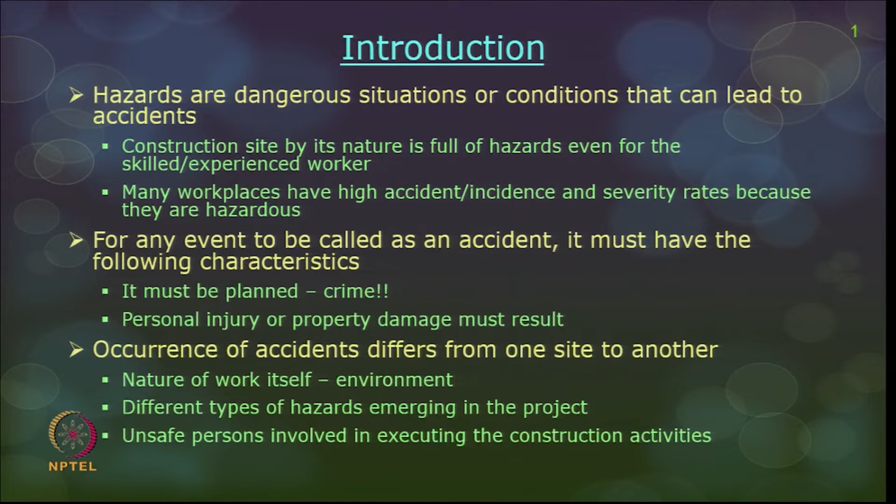Different types of hazards emerge in a project because projects are generally unique and challenging, and unsafe people involved in executing construction activities is also a common factor, as we saw in last week's class. So most accidents are actually linked with unsafe activities of workers available at the site.

Let's get an idea of the causes of accidents and their effects. Causes start from carelessness of the work nature - even though you know you have to take all precautions and how to execute the work, sometimes it goes off your mind and you are careless, along with negligence to follow safety rules and procedures. This is primarily one reason, and it ranks number one in many construction sites.

Unsafe working conditions, for example, dropping or throwing materials from high rise structures just because you do not want to come down or pass the material through proper ways like a chute. This dropping is primarily an unsafe working condition or practice.

Failure to follow safety rules includes an improper way of operating equipment or executing construction work, or operating a defective tool or machine - these are all failures to follow safety rules. Even failure to wear PPE is also one of the violations of safety rules. Improper use of safety items, like faulty scaffolds or ladders, the way scaffolds are used in construction sites - all these can be examples.

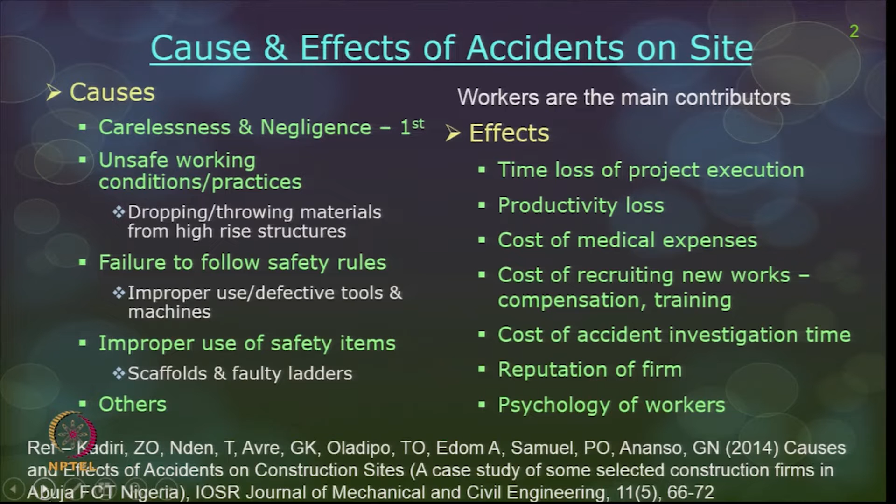So accidents have to be controlled. There's also the reputation of the firm, and the psychology of workers - when they start feeling they are always unsafe in the workplace, that psychology can demotivate them and reduce productivity.

Now, what do you mean by accident investigation and why should you do it? So now we are into the topic. It is important to investigate all accidents regardless of impact or effect.

Even an incident should be investigated, because sometimes there's no impact, a near miss, but you cannot keep quiet, because some unwanted event has happened which should really be looked at, analyzed and investigated. So in this topic you can colloquially use the words incident and accident together.

Accident investigation is a main component in many safety and health programs, and a very important element, because if you want zero accidents on a site, or a completely safe construction site, you should have accident investigation as one of the key programs. It helps you analyze the causes of an accident, identify problems or mishaps in how construction work has progressed, and helps you put a stop to unsafe practices on site.

So what do you mean by accident investigation? It is nothing but a procedure to find the causal factors of an accident without finding fault or blaming someone. Obviously, when digging out the causes of an accident and going in depth, you may have to point out that someone has done something wrong.

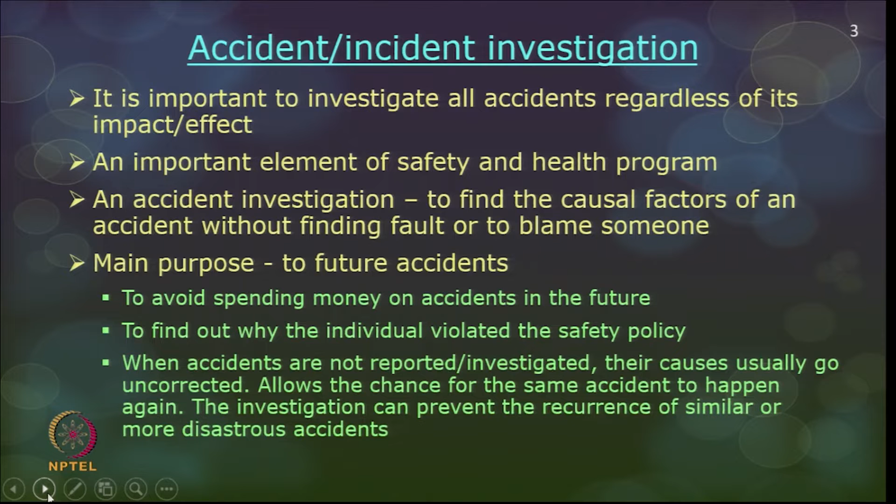To find out why the individual violated the safety policy - maybe there was a head injury because workers did not wear hard hats - but why did the worker violate that safety policy and not wear proper PPE? That should really be investigated, rather than just punishing the worker for not wearing the PPE.

When accidents are not reported, investigated and analyzed, the basic cause that triggered the particular accident will still be there - it will not be corrected, rectified or modified. This always gives a chance for a future accident to happen at any time during construction work, and next time it could be even more dangerous or disastrous.

So to avoid that, every small alarming call should be taken seriously and investigated. Let us continue with the steps involved in investigating an accident.

Number one is to report the occurrence to a designated person in the organization. First of all, you should know whom to report to, and before that you should also know what occurrences you should report.

This we have discussed in the last week's class itself. Any death, major lost work day case, or restricted work day case, everything should be reported. Sometimes if an organization wants a zero accident site as a serious goal, then even near misses and health issues have to be reported. During training and safety meetings and talks, you should be very clear on what to report and at what point of time. Primarily, you have to report immediately, but you should know a priori, before you start working at construction sites, what issues to report and bring to the knowledge of higher officials, and also know whom to contact and report to.

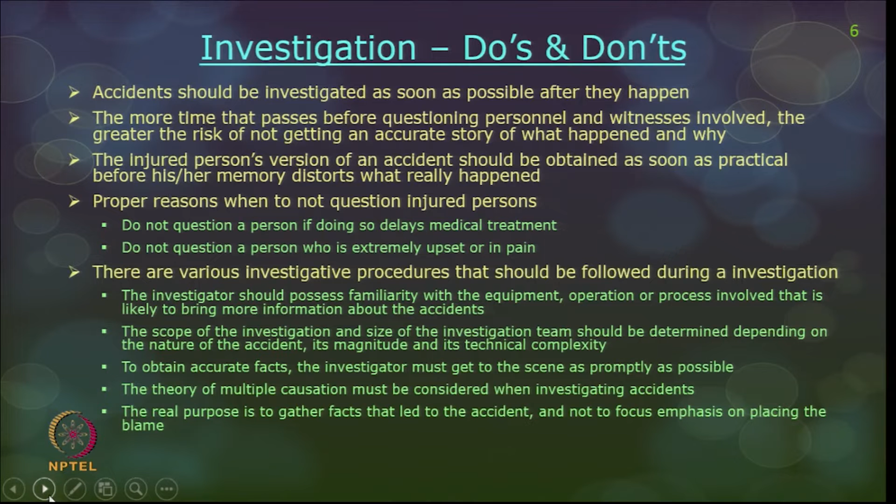The real purpose of accident investigation should be only to identify facts and to have a corrective action, rather than cornering a worker or putting emphasis on placing blame on somebody. That should not be the main motivation.

So what should you do with the actual investigation process? You should always first think about how the level of investigation should go. Should you have intermediate levels, or maybe the first level will be only to analyze and understand what happened? Intermediate levels will give you clues and hints.

If you are not able to put all the jigsaw puzzle pieces into one nice story, then you may have to do two or three successive rounds in order to have a very accurate picture of what happened. The time taken for the investigation also depends on the seriousness of the accident and its effect on the project team.

The next thing is deciding who will investigate, because the investigator should be able to continue with further investigation even if he meets a dead end. Sometimes he starts with a predetermined mindset, asking questions, and after some time the witnesses don't have anything else to add, so he's in a dead end. You should always have an investigator who tries to put things in a dynamic situation and starts interrogating from a different scenario and perspective.

You should also decide how much time will be allotted. Generally a fixed time is not good. If you say the investigation has to be completely done within 2 days, then you are not going to analyze the real reason for an accident at all.

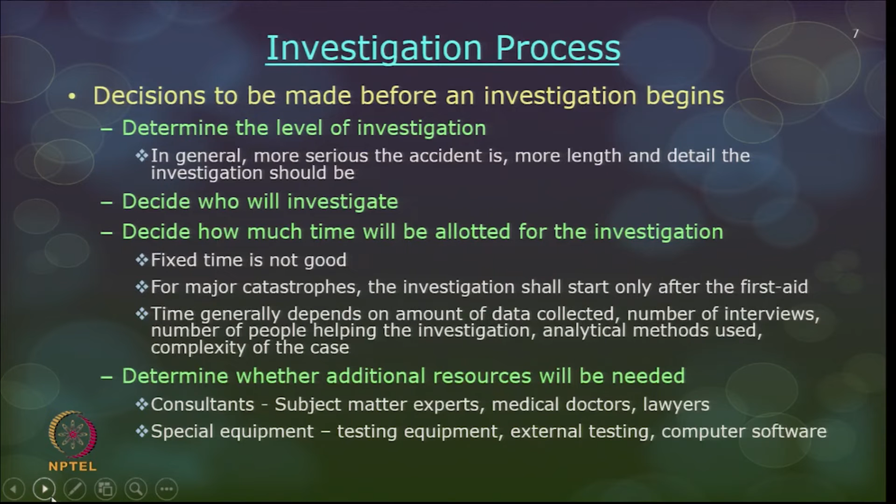The next thing is special equipment. Just for testing something, external testing, or you want specialized computer software to analyze some material and debris and so on, then accordingly you should also plan for additional resources that are required in the investigation.

So why do you need special experts? Sometimes there may be an in-house accident investigation team to carry out the investigation process, but sometimes if the accident is too complicated or it has attracted media attention, then obviously you may have to bring in outside help. Sometimes if the particular accident needs specialized experts and specialized equipment, as mentioned in the previous slide, obviously you need a special team and specialized equipment and software for the investigation process.

This may include employees with knowledge of the work, supervisors in the area of the work, and health and safety personnel. It may be from the same company, or you can bring in external experts. Employers with experience in investigation, and representatives from local government or police are also required if there is serious danger and investigation required.

How are the facts collected? What are the different forms of collecting evidences from the construction site accident?

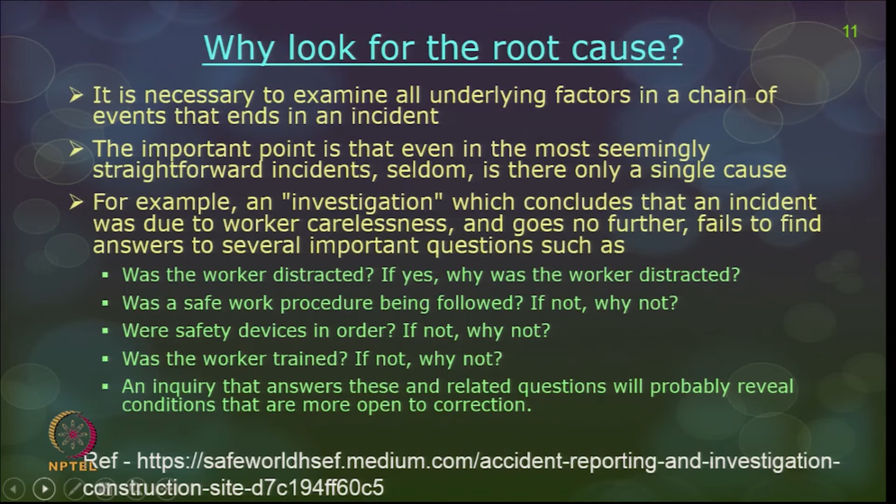For example, why was the worker distracted, and what was the reason for his distraction? Was a safe work procedure followed or not, and why not? Why were the safety devices not in proper order? Was the worker trained - if not, why? You should have different perspectives on the same question, rather than just writing that the worker was careless and hence the accident occurred.

Then comes the last step - closing out the investigation. After you have done the investigation procedure and analyzed the multiple causes, the next step is to document everything and close out the investigation.

Why should you document and write it as a report? Because a future event may or may not happen, and you can go back and see what happened earlier. So, for your own organization's assessment, you should always try to document the investigation.

Now, the biggest question for the investigator is what happens if it just points to one worker or a group of workers in terms of human error. As we've seen, every accident results from some unwanted happening. But even a faulty equipment poses a hazard only - it can lead to an accident only when a worker goes near and does something.

So obviously, there is a human factor which intervenes and triggers an accident to happen. It is very difficult to avoid the human issue entirely when bringing out the accident report, so obviously it will be there.

One important thing in accident investigation is to reveal whether it was done willingly, on purpose, or by mistake. That should come out clearly in the investigation process. But if an accident happened with the willingness or knowledge of the worker, that should be taken up very seriously, and the worker should be warned against any such malpractice in future. So, how should the follow-up be done?

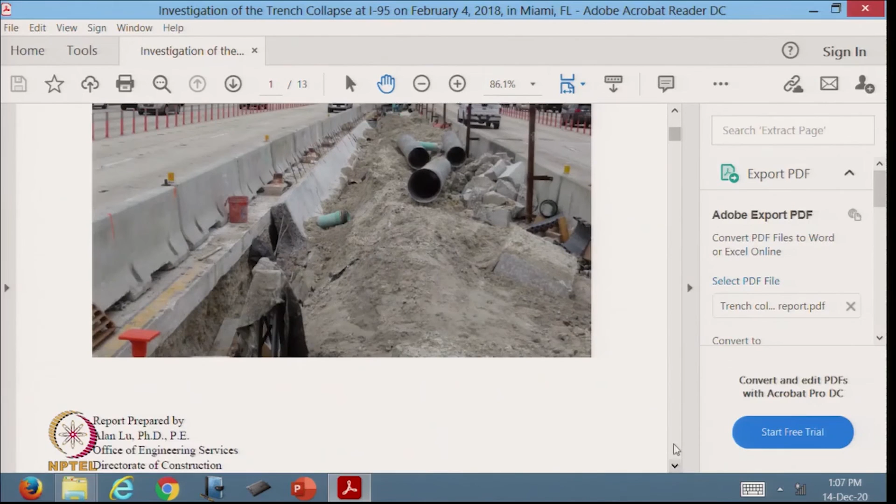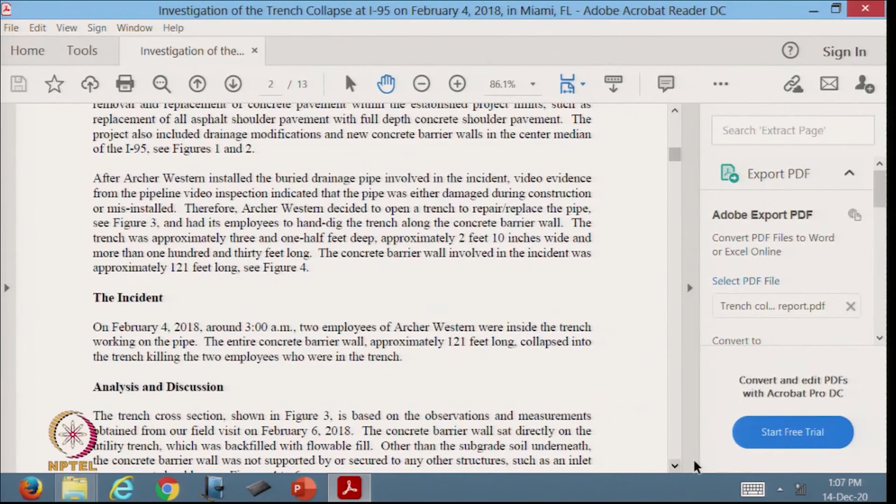This is an investigation of the trench collapse which happened in 2018 in Miami, Florida. This is a Miami rehabilitation project, and in 2018, two employees were inside the trench working on the pipe, and the entire concrete barrier wall, approximately 121 feet long, collapsed, killing those two workers inside the trench.

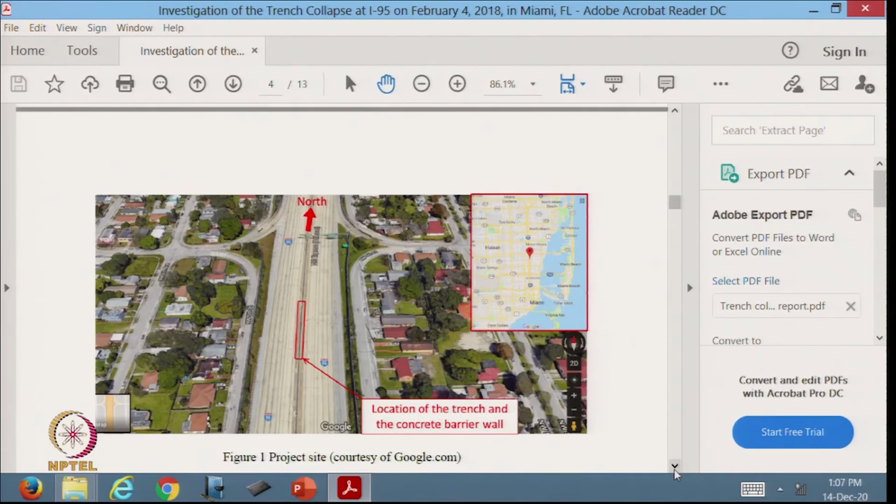Let me show you what happened here—you can also read this report later. This is a side picture showing the trench and concrete barrier wall, the pavement, the shoulder, and below the barrier wall there was a flowable fill. If you see the barrier wall, after it was excavated, it did not have any underpinning or support, so it was just standing like that.

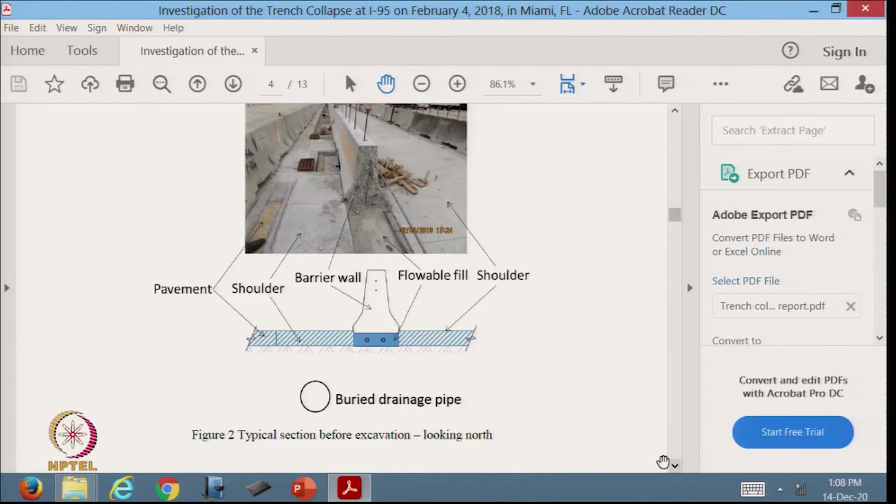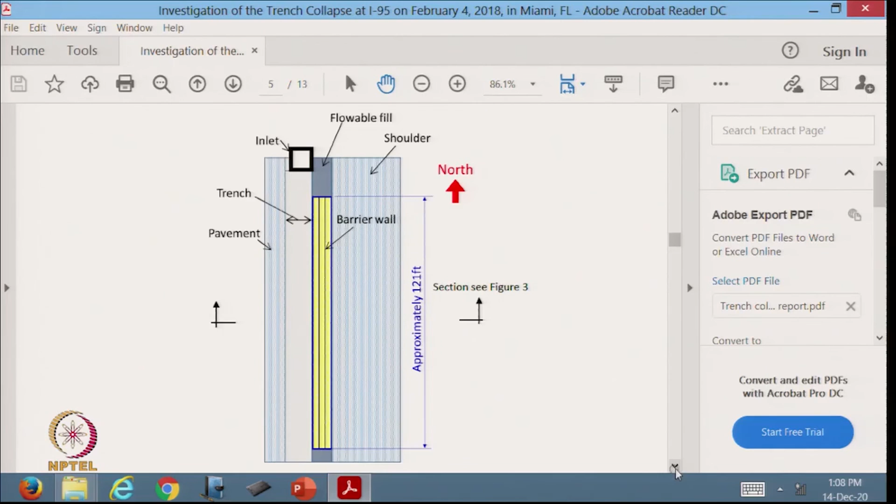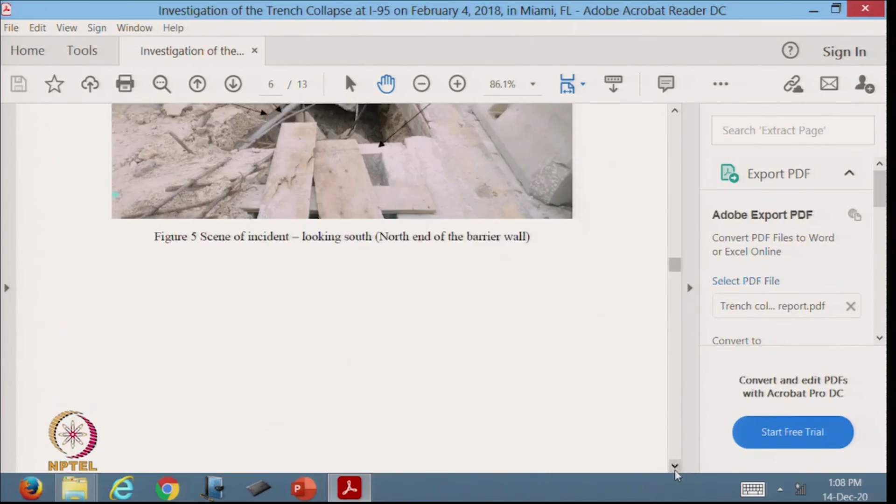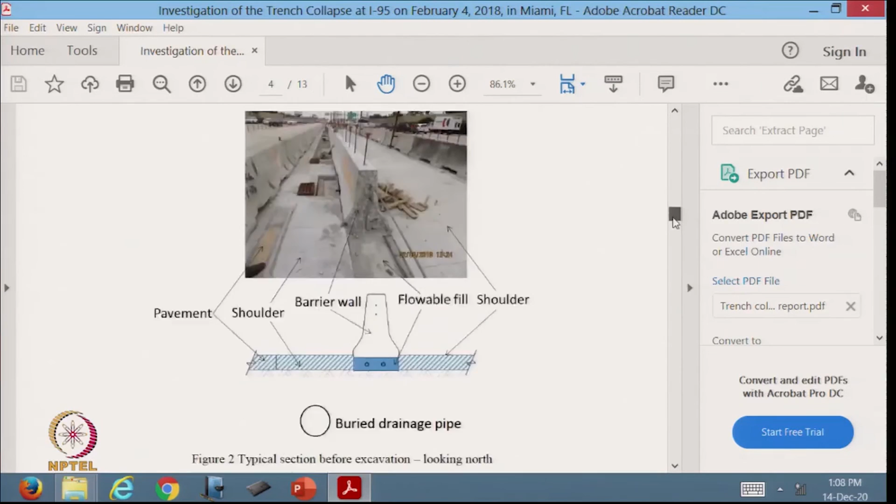This led to the collapse of the concrete barrier wall. There was a flowable fill here which led to the collapse of the wall. This is another plan view. So this concrete barrier wall just got collapsed—these are other pictures. A lot of investigation happened as to why this collapse occurred.

Further investigations on soil samples, interviews, and everything happened, and the final conclusion was that the cause of the failure was instability of the concrete barrier wall, caused by the trench excavation operations. The workers wanted to lay the pipes, so they did an excavation, but the trench shoring was not safe, and they failed to underpin the concrete barrier wall, so as a result the accident took place.

No support system such as shoring, bracing or underpinning was provided for the stability of the concrete wall during and after the trench was opened. There was a violation of the OSHA standard rule, which states that whenever you do excavation work, appropriate shoring, bracing or underpinning of adjacent structures has to be done. They did not take care of this safety rule, and they also did not conduct any inspection of the excavation and adjoining areas by competent personnel, which is required per OSHA guidelines. These were the reasons which led to the accident.

This is how an accident investigation has to be documented. I brought this only to show you a sample.